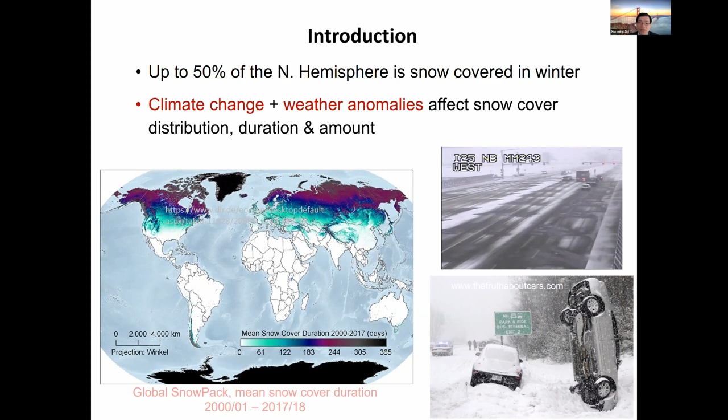And what I present today will actually be published as a paper in the Journal of Cold Regions Engineering. First of all, why do we care? First, you look at the global situation: up to 50% of the northern hemisphere is snow covered in winter, as shown on the bottom left. On top of that, when you look at climate change and weather anomalies, they do affect snow cover distribution, duration, and amount. When it comes to surface transportation systems, that could translate to risks to the driving public.

So in the United States, according to the Federal Highway Administration, more than 70% of the roads and 70% of the population are located in snowy regions, as you can see in the map in the middle. The areas in the blue circles are considered snowy regions. So each year, highway departments spend approximately $2.3 billion fighting snow and ice to make the roads safe and drivable. And the indirect cost in terms of damage to the infrastructure from such operations is another $5 billion.

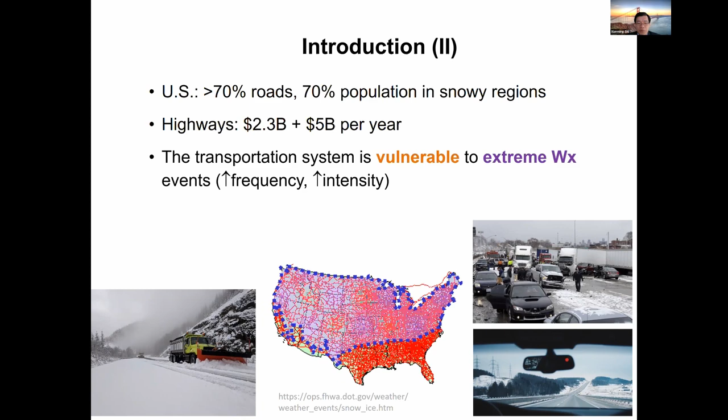And the surface transportation system is vulnerable to extreme weather events. As we know, recent years have seen increased frequency and intensity of such events, and that further adds to the challenge. So to mitigate the negative effects of winter weather, winter road maintenance operations are essential for safety and mobility of the driving public.

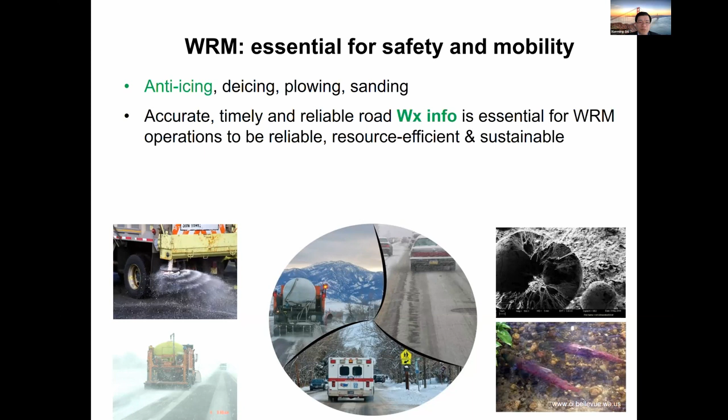In the toolbox of the transportation departments, there are different practices such as anti-icing, de-icing, plowing, and sanding to provide a reasonable level of service under winter weather, especially with some of the newer or more effective practices such as anti-icing. They tend to be more proactive and rely heavily on accurate, timely, and reliable road weather information.

And if we do it right, at the right time, the right location, then we can use less salt or less abrasives, and therefore the operations can be more reliable, resource efficient, and more environmentally sustainable. Because recent years have also seen increasing concerns over the potential risks to infrastructure, to motor vehicles, and to the natural environment.

And a case study of Utah Department of Transportation we conducted a number of years ago found out that by increasing the usage and improving the accuracy of weather information, we could significantly reduce the winter road maintenance costs. Well, that also translates to less salt use and less damage to the environment and infrastructure.

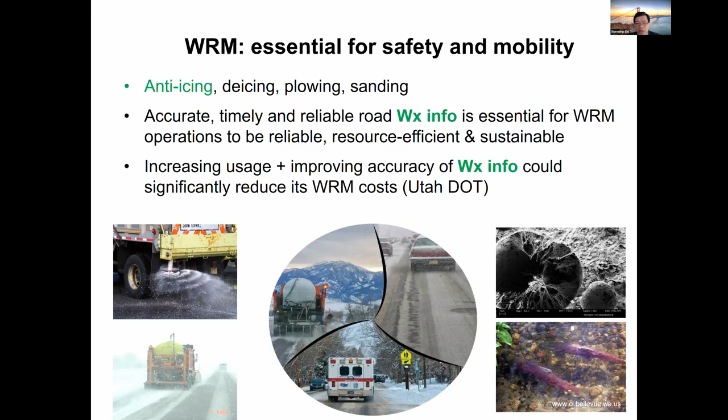So in that context, connected vehicle technologies hold great promise because this presents an opportunity to vastly increase the spatial and temporal resolution of road weather data. When I talk about connected vehicles, I'm not necessarily referring to autonomous vehicles, even though autonomous vehicles are connected, but not all connected vehicles are autonomous. So just to make a distinction there.

Anyways, CV technologies enable mobile data collection and supplement the present capabilities of road sensing. Currently, mostly we're relying on things like road weather information systems or RWIS stations. Those are typically at only a limited number of fixed locations. And also CVs would enable better response to changing conditions and improve efficiency and effectiveness of the operations.

In Europe, a project, the European WiSafeCar project, already explored the use of V2V and V2I technologies, vehicle-to-vehicle and vehicle-to-infrastructure technologies. There's also V2X, basically vehicle to everything, vehicle talking to everything else, pedestrians or other devices.

And the Federal Highway Administration in the United States already developed this architecture reference for cooperative and intelligent transportation, which defines how CVs would be beneficial to a variety of service programs, including road weather applications.

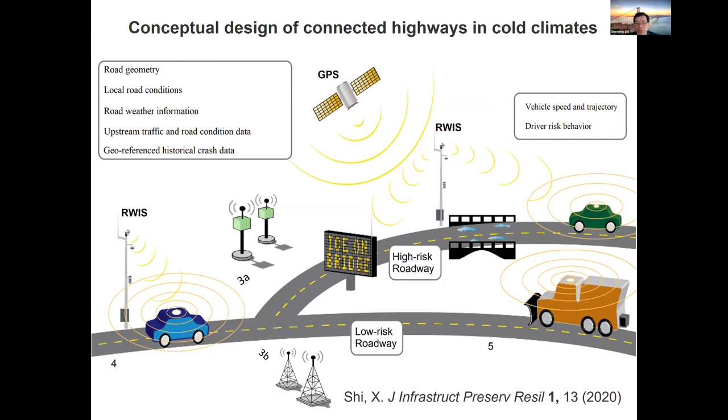What's interesting is also, in addition to connected vehicles, one would argue that both physical and digital infrastructure should be upgraded to take advantage of the emerging technologies so that we can facilitate better integration of vehicle and infrastructure, or VII, vehicle infrastructure integration, and to enable better decision-making across various stakeholder groups. This was a commentary I published last year on that issue. But today's talk is truly on connected vehicles, so let's switch gears back to CV.

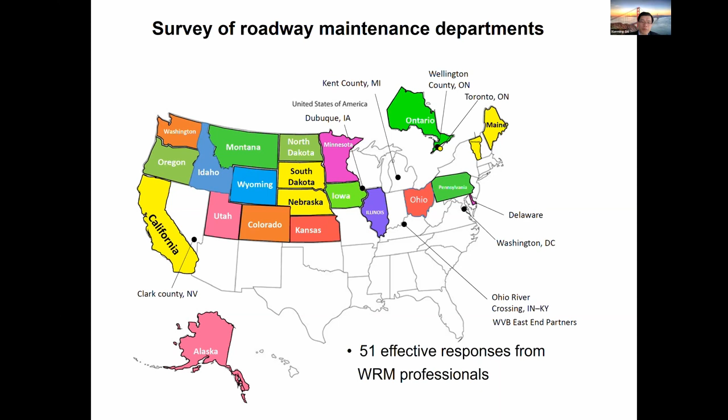To understand what the highway departments think of CVs in terms of helping their operations or providing better service, we conducted a national survey of transportation departments across North America. As you can see, the map highlights where our responses came from: 51 effective responses from winter road maintenance professionals. And right now, we'll look at how they collect road weather data.

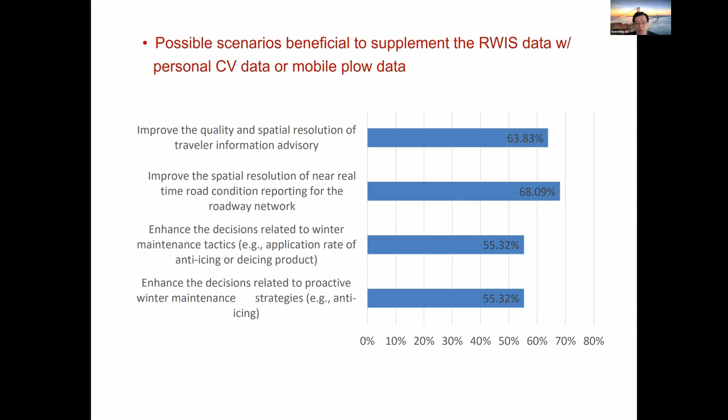And also we asked them to rank different scenarios where they could potentially incorporate the traditional RWIS data, which is a limited number of fixed locations, with the personal connected vehicle data or mobile plow data, which will be across the entire roadway network. As you can see, most of them think such integration would really benefit traveler information and advisory, benefit road surface condition reporting, enhance decisions related to how we do anti-icing or de-icing or other operations, and how we do a better job with proactive maintenance and provide a better level of service.

And on the other hand, most agencies anticipate that such integration will be really difficult. There are also two main concerns we identified, one of which was how CV would perform as part of the system under poor weather conditions, because both the physical and digital infrastructure might become vulnerable under extreme winter conditions. The other one is really security. System security from hackers is another major concern.

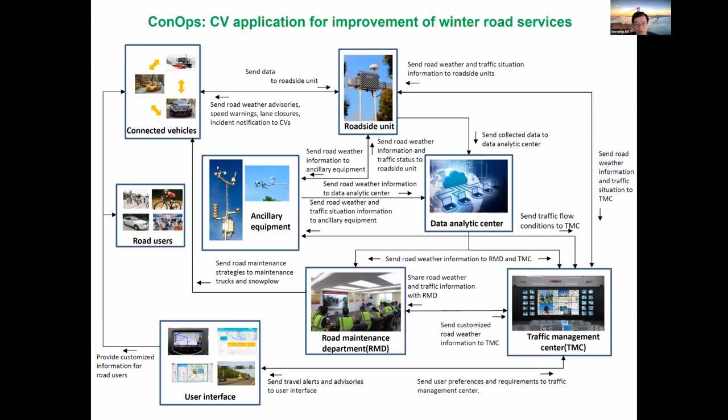and also interacts with the data analytical center, where the data is being quality controlled, and the algorithms or models are used to derive alerts and advisories, and those are further sent to either the road maintenance department or the traffic management center, or TMC, through which they can send information for traveler information purposes, such as user interfaces like the 511 system, highway radio, websites, or your phone apps. So in such a proposed system, we basically have four different subsystems for information collection, processing, communication, and distribution.

Again, if you're interested, you can read the paper or our final report. But basically, I want to talk a little bit about the information processing. As you can see, from roadside units and the ancillary equipment, the data is fed into the module to process for quality control analysis, and then you move on to the risk assessment module where algorithms or models are used, and then it's fed into the alert module. So what's unique about this concept is that, first of all, we propose to deploy multi-access edge computing at roadside units. Traditionally, all the data are sent to central cloud computing, which causes challenges for data storage or delay.

Another thing is that we propose to customize the information for users. For different user groups, you have different types of alerts or information service, so that would better meet the diversified demands and enhance users' trust and willingness to participate. Because in addition to the connected snowplows, we need personal vehicles to be more connected, so that we can achieve a higher level of market penetration for CVs.

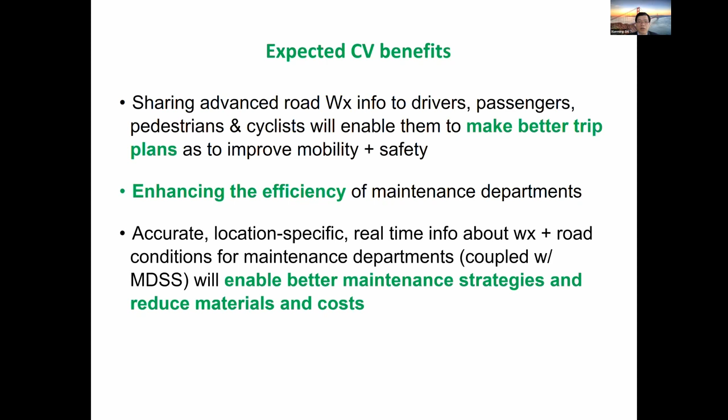There are some limitations, however, in this concept. First of all, we need enough roadside units and enough CVs, right? So we talk about the density of the units or the market penetration of CVs. Also, with the tremendous amount of data available in real time, that poses a challenge for server capability and performance. Also, the transmission becomes a challenge because you do need encryption technology and other firewall technologies to make sure it's secure, away from hacker attacks. And also the user interface will be critical to convey the message without distracting the driver, for instance.

To conclude my section, winter road condition assessment using CV technology has been demonstrated and will likely be widely implemented by DOTs, mostly for two reasons. One, better decision-making for winter road maintenance. The other is really providing better travel information and advisories. And also, there has been very limited development or pilot testing of CV applications designed for improved winter travel.

And we can see that DOTs are still a little bit worried about integration of CV with RWIS and system performance, privacy, safety, driver distraction, and the cost. And the concept, again, is to collect the mobile road weather information from CVs through the controller area network and the AVL, automatic vehicle location, and vehicle-mounted sensors.

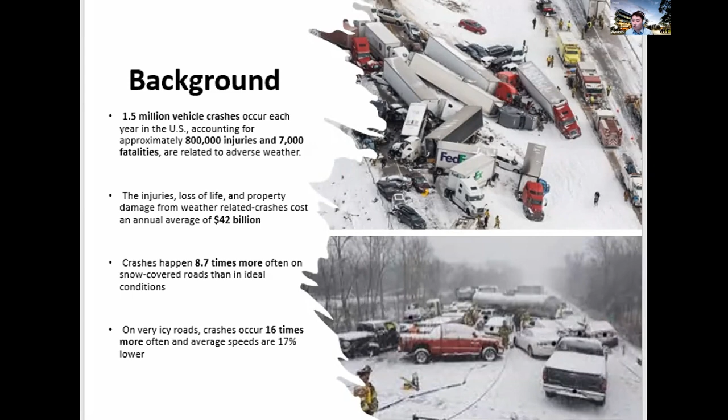Approximately, we need to spend $42 billion covering the cost of the injuries, the loss of life, and property damages from weather-related crashes. And as in Professor Shi's introduction, we still have lots of other statistics that prove inclement road weather is a notable inducement of traffic crashes. And most countries spend considerable resources solving the traffic problems caused by adverse weather.

However, sometimes we do face problems building a perfect winter road maintenance strategy. For example, the information is not enough for us to know when the road weather will become worse for driving, which part of the road segment needs maintenance activities, and how much we need to spend addressing road weather issues. And sometimes we only have a very short time period to respond to the inclement road weather.

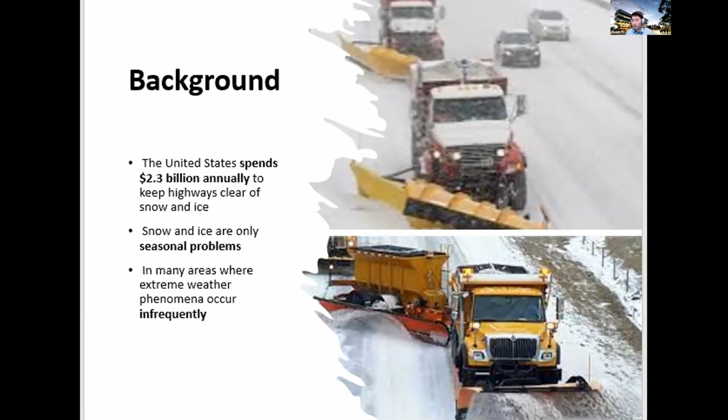So in order to have real-time information on the road weather, the Department of Transportation employs road weather information stations for acquiring information to support road maintenance activities. However, due to the cost and other considerations, we cannot build the information stations everywhere. The coverage of the information system is limited, and only a few parts of the road segments can be monitored by road weather information stations.

And in order to widen the monitoring range of the information stations, people build road weather models for estimating road weather conditions in places where we don't have road weather measurements, but we have some air weather condition data that we can use for the estimation.

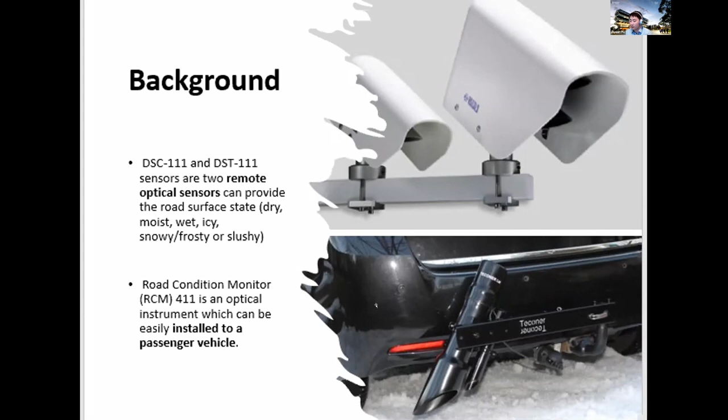So as I mentioned, sometimes we have too short a time period to respond to the inclement road weather. So if we can have accurate predictive road weather information, winter road maintenance will become more efficient. The aforementioned considerations motivated us to conduct this research, and our research purpose is to develop a road weather condition prediction model utilizing connected vehicle data. The purpose of the research also includes accommodating other problems with road weather prediction, such as dealing with missing values in the dataset, and setting the hyperparameters of the prediction model.

So we built a two-step method for road weather prediction. The first step is road segmentation. So when a vehicle which is equipped with a sensing device drives through a specific corridor, we will have road weather measurements for each road section along this corridor.

And generally, the adjacent road segments share similar properties, but the distant sections tend to be different from each other. So the road segmentation is to guarantee that only one road weather condition exists within each road section. And we utilize the k-means clustering algorithm for road segmentation. And after segmenting the whole road into multiple road sections, in the next step, the road weather prediction will be conducted for each road section independently.

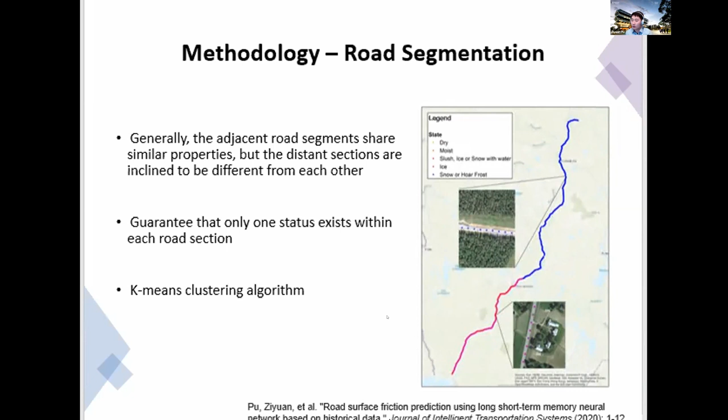So previously, several literatures demonstrated the time series features of the formation of ice on road. So this road weather forecasting problem becomes a time series prediction problem. So if we have one measurement of road weather of a specific location per day, after several days, we probably can forecast the road weather in the future based on the measurements in previous days.

And among all the time series prediction models, long short-term memory neural network is one of the most popular ones, characterized by the capability of handling not only the short-term time series features, but also long-term patterns. Scholars have demonstrated its superiority in forecasting tasks. And in this study, we utilized LSTM as the prediction algorithm for road weather prediction.

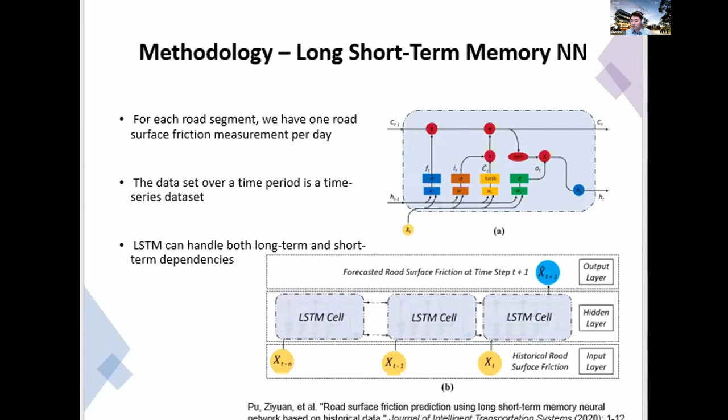And these two figures show the framework of the LSTM. And basically, the input of the algorithm is a vector of road weather measurements. And each element of the vector would be one day's measurement. The output is the predicted road weather information in the next time step. And due to time limit, I won't go into the detail of the algorithm structure. So if you are interested in the algorithm, please check out our publications in the Journal of Intelligent Transportation Systems.

So we designed several experiments to validate our proposed algorithm. We collected the data from an open source website provided by the RCM company, and data was collected by one RCM sensor from a main corridor in Finland, which is called E75. And the RCM sensor was installed on a maintenance truck, and the truck drove through the testing field at least once per day. So finally, we got a data set with more than 1 year of data from 2017 to 2018.

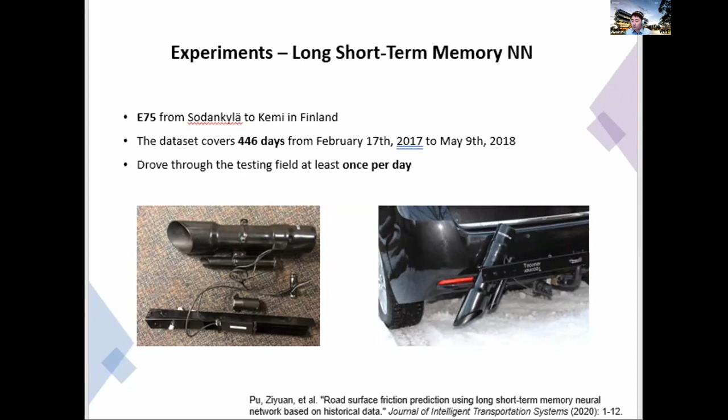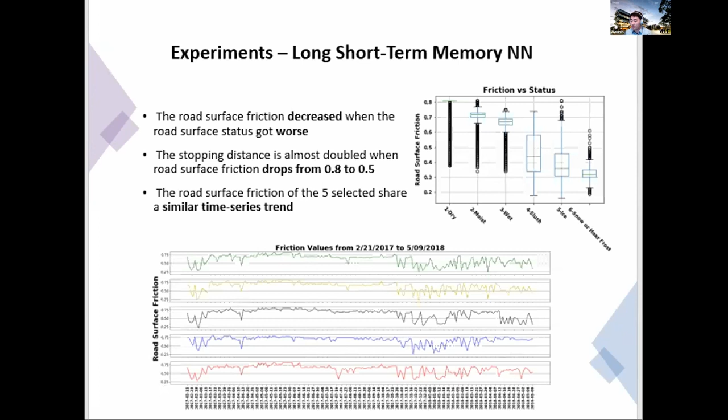And those two figures show the statistical description of the data set. The right top figure shows the box plot of road surface friction versus road surface condition, and obviously the road surface friction decreased when the road surface condition got worse. And after the road segmentation step, we got more than 1,000 road sections of this whole road. And the bottom figure shows time series patterns for 5 randomly selected road segments, and they share a similar time series trend in this data set.

So we also investigated the impacts of several hyperparameters on the predictive performance, including the number of time lags, the interval between time steps, and additional inputs of the model. And finally, we got the most precise prediction when the number of time lags equals 7, and when the predicting time interval became larger, the prediction accuracy decreased.

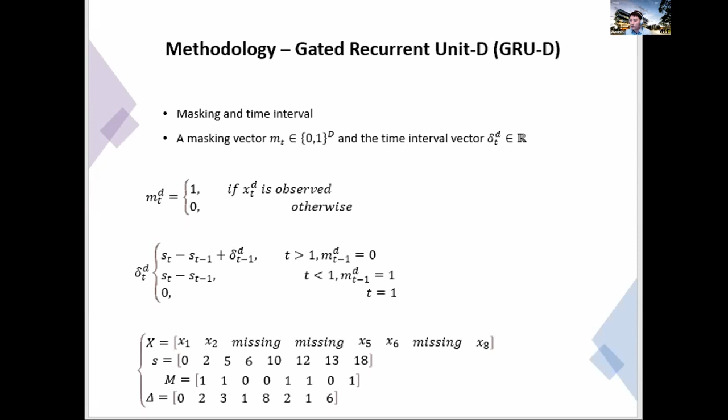So the gated recurrent unit is the simple version of LSTM, which is more efficient for computation. And we also deploy 2 decay rates in the unit to handle the missing values. The decay rates are learned from the training data. The exponential negative rectifier is deployed to keep the decay rate in a range between 0 and 1.

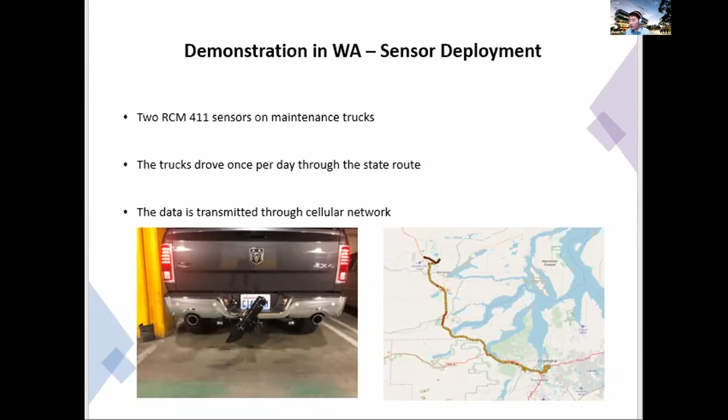So we also demonstrate our proposed method in Washington State. We installed 2 RCM 411 sensors on the maintenance truck, which drove through the corridor shown in this figure once per day. There is a phone in the vehicle connected with the RCM sensor, and data is transmitted to the phone through Bluetooth, and then sent to our remote server through the cellular network.

We utilize the DriveNet system as a data analysis and visualization platform, which was originally established by the STAR Lab at UW for lots of big data implementations in transportation engineering. WSDOT also employs this DriveNet system as one of the main tools for traffic data analysis in Washington State. Recently, I noticed that the 4th edition of DriveNet was just released several weeks ago. If you are interested, you can check it out through this link.

For our implementation, we also embedded the proposed prediction algorithm in the DriveNet system. Once the system receives the data from the RCM 411 sensor, it matches the sensor data on the spatial map, and then the data is transferred to the LSTM module for generating the prediction results, and the final step is data visualization. This is the platform of our visualization tool, and the road is marked in different colors based on the predicted road weather condition. The user can also select a specific date to request the prediction results.